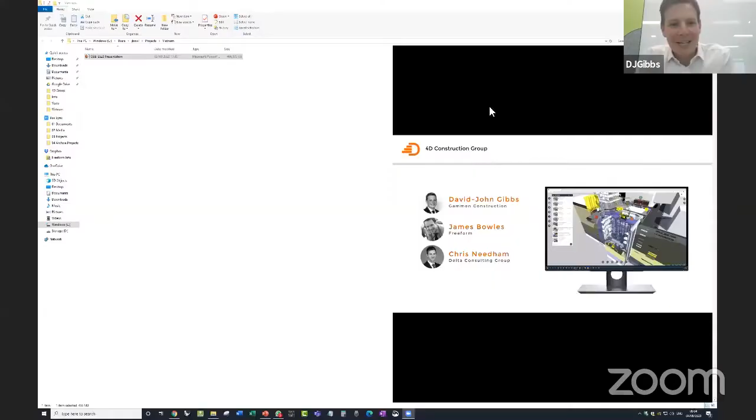Okay, great. What I should mention is apologies for Chris being left off that slide. So Chris Needham's joining us as well. And yeah, well, we're lucky to have him.

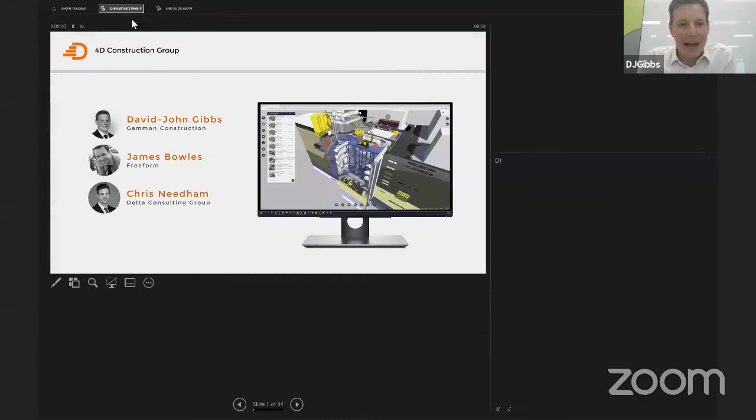I'll do a quick intro as to who we are, and a little bit of the format that we'll be taking. So this is a presentation, but we're not presenting our individual organizations. We're actually offering a presentation as part of the 4D construction group. We're an independent group of 4D modeling enthusiasts, and our goal is to promote the adoption of 4D modeling around the world.

We share our experiences to help accelerate people's adoption. Some of those people may be starting their 4D journeys as part of their BIM or digital journeys. Others may be doing it already but are looking to enhance what they're actually doing. So we try and tackle it from all angles.

What we're actually going to do today is slightly different to a traditional presentation. As the group, we get asked a lot of questions about 4D modeling. And what we found in the past with other presentations or opportunities like this is to share and discuss between the three of us, kind of like a panel, the answers to those common questions.

So I'm joined with James and Chris. Chris, do you want to first introduce yourself and a bit about your background?

Yeah, thanks. Hi, I'm Chris Needham. My background is predominantly in project planning. I came up through a site engineering route and then went into project planning quite early after my university degree. I guess I fell into 4D through that because essentially I can see 4D as a communication tool for project planning, which we'll obviously talk about quite a lot. But yeah, my background is mainly from project planning, and that's how I've got interested in this.

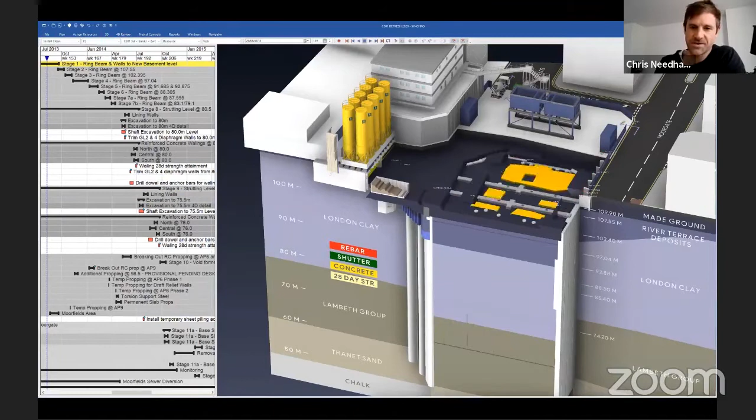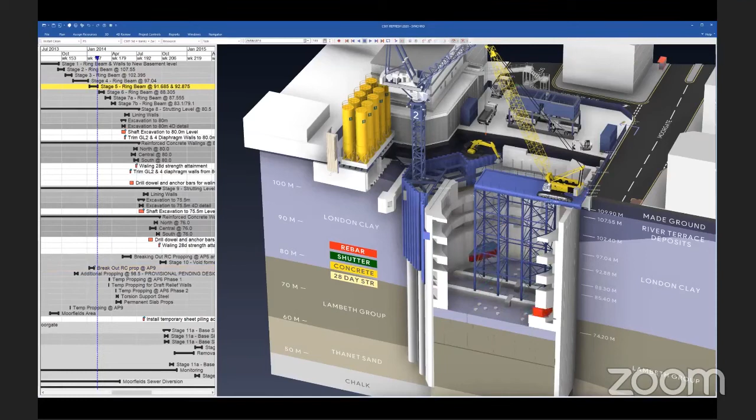But it's so much more than that. It becomes a communication tool, basically to visualize the Gantt chart for a start, or whatever way you're linking activities, but also to expand into other aspects of the project—not just project planning, but things related to health and safety, and then adding in other layers like your site logistics, your temporary works. So the value of it just extends beyond seeing the permanent works in sequence on your plan. It becomes a communication tool for the whole project for a variety of things.

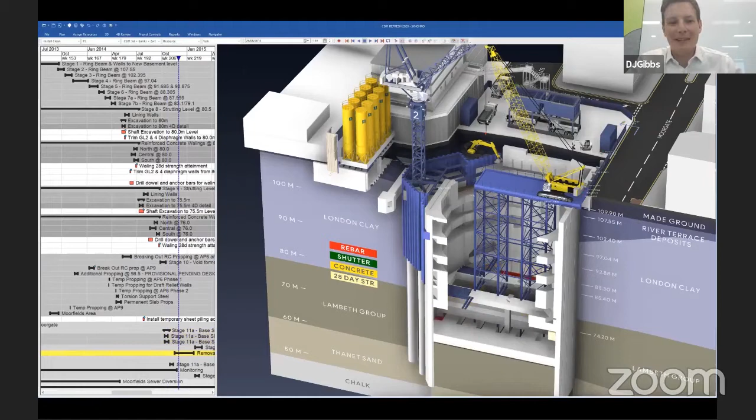Yeah, so I know we often get asked, is 4D the right term? And what does it really mean? We had a meeting with someone a couple of months ago, and they said it's a bit like a bad nickname—you get given it and then it sticks. And we've discussed as part of the group whether 4D is the right term for what we're doing.

We've talked about visual planning, people couple it with virtual design and construction, lots of different terms. For us, we're fine with 4D because a lot of people understand that term and relate to it. But for us, like Chris says, it's about a communication tool to help with planning a project better. And that's not planning a project in terms of creating a better Gantt chart or a better schedule—that's planning as in the project team coming together to discuss how they're really going to build this project.

So a tool that facilitates discussion between the project team. That's not just the planner and the BIM team, that's the logistics managers, the construction managers, perhaps the commercial team, safety officers, and so forth. So it's not isolated, in my opinion, to a specific individual or a specific job title. It's to help the whole project team deliver that project better. You'll have specialists using the tools for 4D, like the software packages, but they're just part of the team facilitating. It's not their responsibility to solve all the problems. That's the whole team effort that comes together using this tool.

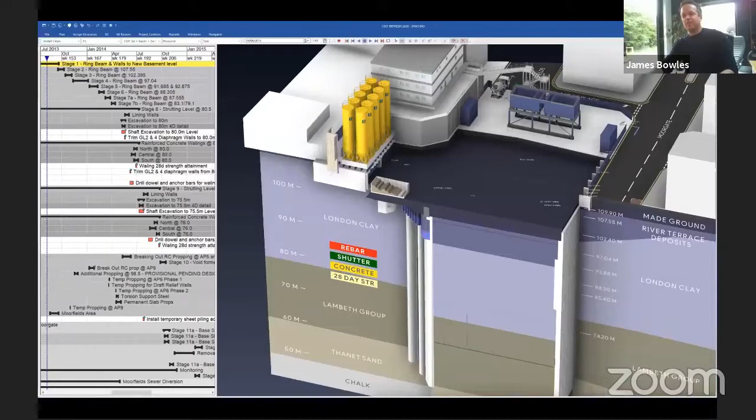Okay, there's very little I can add to that, I think you've covered everything. So if I go back to the model, 4D, like you're saying, it's 3D plus time, but it's also the process, the method of doing it that's really important. It's important to get people in a room using the model, and to do it early before you've made all your decisions. But yeah, it's collaborative planning. It's a better way of working.

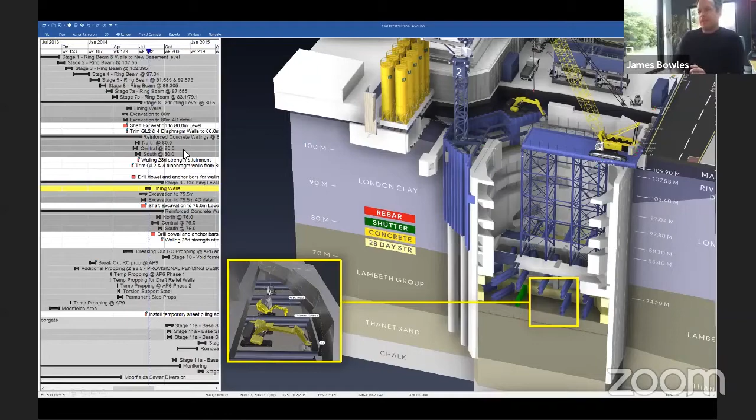So if I remember the slide deck, skip through those. Why do teams do it? Why bother doing 4D? Why not stick to just Gantt charts and activities? Why is it better?

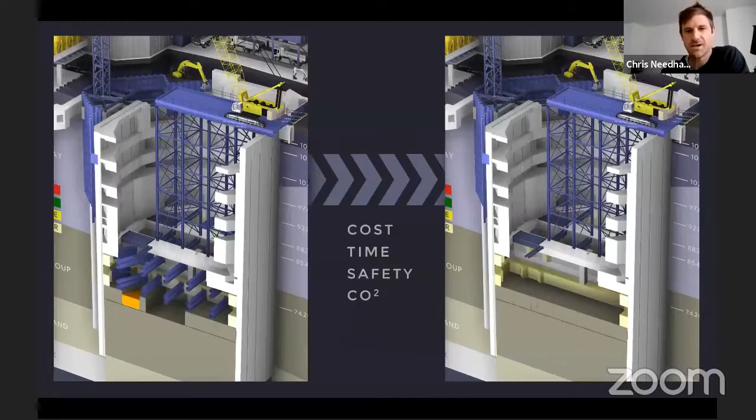Yeah, I think we sort of touched on it there. It's bringing the team together, because traditionally, sometimes you get situations where teams are in silos and they produce information independently and then stick to their roles. You've got cost guys doing the cost things, engineering guys doing their bits, and then maybe the planner will do his bits in isolation. What we're trying to do here is get everyone round the table or in the room and provide their knowledge and expertise, by being able to bring the plan out into something way more visual and way more engaging. So that's just one of the reasons to do it, so that you can get a better informed plan before you go and build something. And that's just a catalyst for many more reasons why.

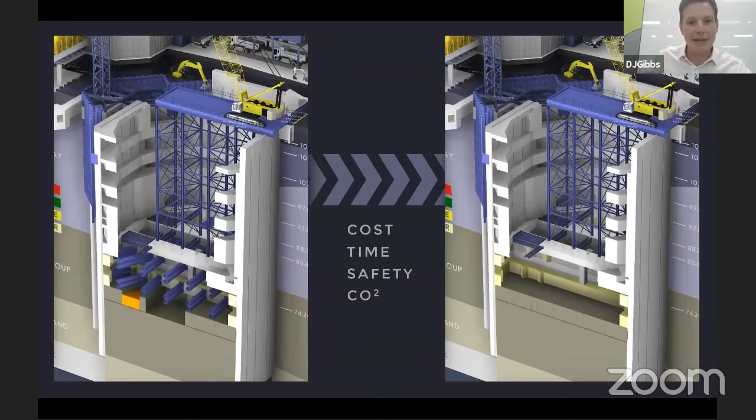Well, and that leads to better, more certain project delivery, right? So you've got better control or understanding of your costs, better control of your timely delivery. You're hopefully creating a safer site, a more environmentally friendly site, perhaps reducing waste and running times of unnecessary plant and equipment. So we believe, well, we don't believe, we know, we've witnessed through better planning using 4D, that you can unlock some of these savings or some of these benefits.

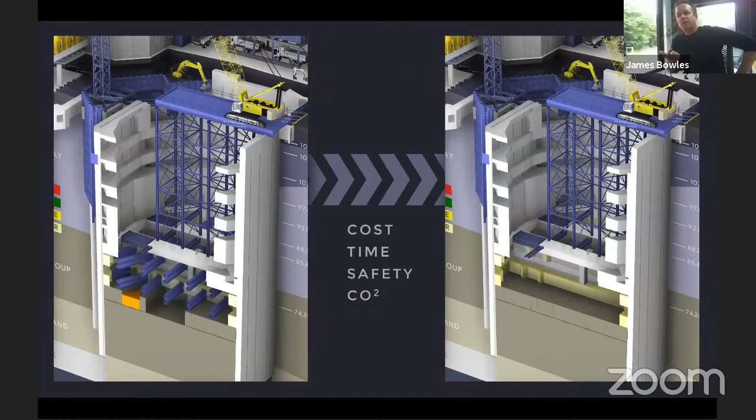Some projects might be distressed and they're trying to pull them back online. It can help with that, but used early, it can definitely help with that front end, meeting those really important KPIs for a project. So it's time, cost, safety, and reducing wastage. And finding opportunities, identifying risks earlier so you can actually deal with them earlier. Because obviously the earlier you can identify things, the more time and the more opportunity you've got to reduce them or maybe even eliminate them.

So yeah, there's so many benefits to getting people in a project engaged around something like this. That's very hard to do using Gantt charts and PowerPoints and sketches of how you're going to go and do something. I mean, I don't mind looking at Gantt charts because I'm kind of used to it, and I have that picture in my head, but a lot of people hate looking at Gantt charts and Excel schedules, because it's very hard to visualize what's going on.

And even linking 2D plans like we used to with PowerPoint, when we do sequence drawings against the schedule, it's obviously not as visual or compelling as linking a 3D model and being able to see that sort of space element as you run through time. It gets you there faster, and it gets other people there faster as well.

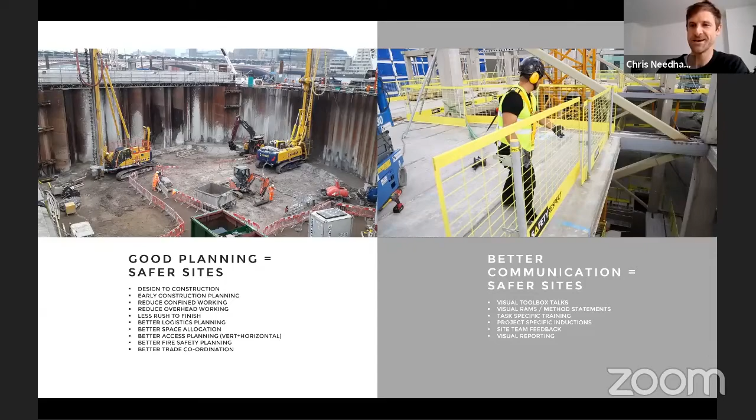But getting that message across is a lot of work. Whereas if you've got something like this, it can be a lot quicker and a lot easier for someone to visualize and ask questions. Because you do want people to ask questions to confirm that they've actually understood it or not. You want to be on the same page.

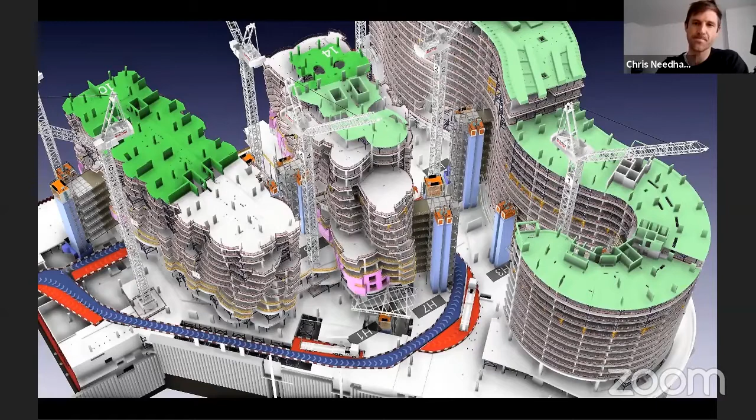So for me, this slide really captivates what the benefits of 4D could be. What we've got here is such a complex site, there's a lot going on, and this is only part of the site. There might be a bit more happening around it too. Just looking at this, you've got 1, 2, 3, 4, 5, 6, 7 tower cranes I think I can count in that image.

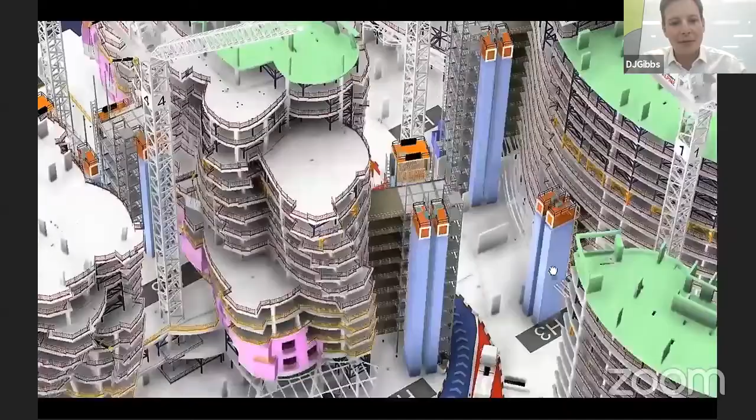Those obviously want to be fully utilized. You've got access roads, trucks parked up with deliveries, lay down areas or storage, and big hoists as well. And that's only at the macro level. Then at a more micro level, at a floor level, which are pretty huge, you've got activities going on within that.

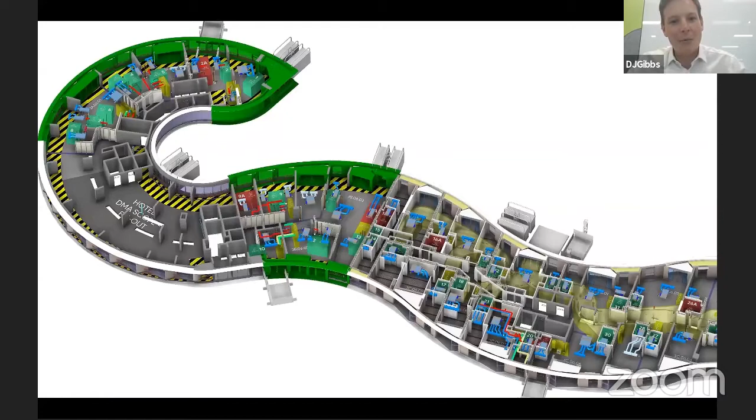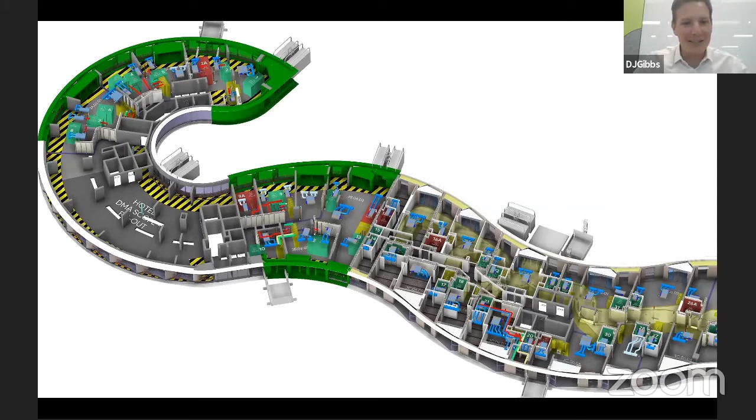Now, that will all be presented in a Gantt chart, and you're going to have hundreds of thousands of lines, or tens of thousands of lines, to try and understand. It can be really complicated. Hoping that everybody in that project team is thinking exactly the same thing, based on digesting all those individual bits of information and thinking about what things will look like at a certain point in the future, is very challenging and very optimistic to think everybody's able to be on that same page.

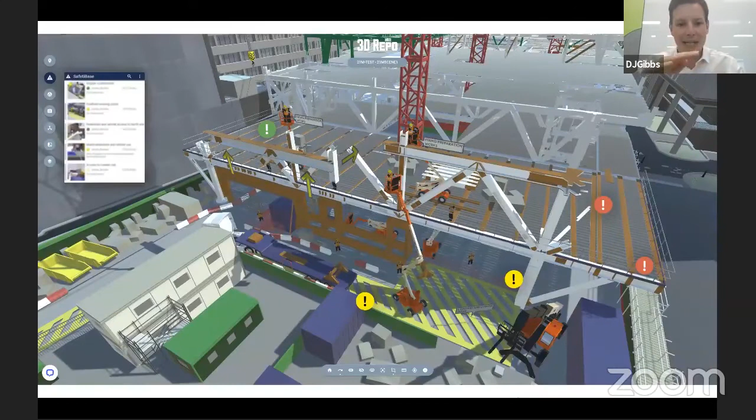The beauty of the 4D model for me is that you're consolidating all, or as much of that information as you can, into a single area, a single medium, the 4D model. You can zoom in and understand, and everybody in that meeting knows that on that date, this is what the construction site is proposed to look like. And everybody can have an input to say, well, that will work, that won't work, or what other measures might be needed to inform that construction.

So we're not waiting to be in the physical environment to have an input. We're building it digitally and then getting the team involved, having that discussion that we would have had on site weeks, months, maybe years in advance, to help improve the performance of that project.

We did a podcast with BAM, and the point they were making was we build it first and then we build it again. When we build it first, we're doing it virtually as a team, so it's the same people doing the same thing, figuring out how to build something, and then they go and build it. You improve performance by that because you're improving safety and methods, and that's what 4D is.

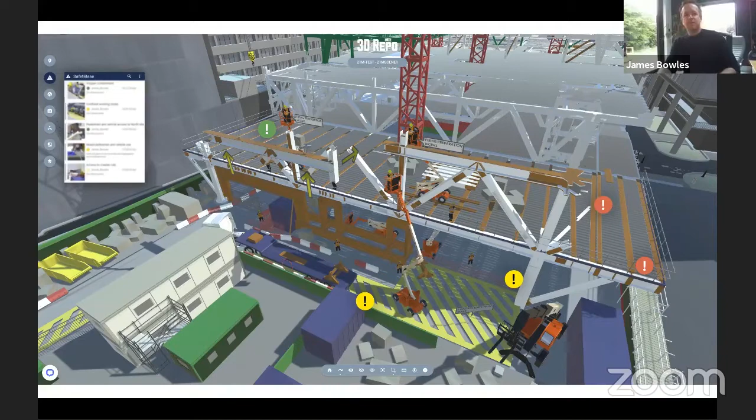So I think that's answered. They used it, wasn't it? Yeah. Oh yeah, I will get that edited, by the way.

And that previous slide's a good one for the safety issues, right? Like I always talk about running that safety workshop or workshops, and not using it as 4D is a facilitator for that safety workshop. It's not the 4D workshop.

And here, you've got great opportunities to add that detail in. You can start tagging issues depending on what software you're using and so forth. So you're recycling that information. You're not producing your 4D for an animation. You're producing it for method statements, for safety reviews, for site posters, for inductions, for sequencing, for logistics.

I wouldn't call it an output. It's a process that provides you with lots of communication measures, depending on who you're trying to get that message across to, whether that's site, senior management, projects team, whatever that might be.

Yeah, and it's these things that we can see in the image here, the actions around building, putting together the permanent design. That's where you get the real value.

Because you need to speak to the people who are going to be doing it, your specialist subcontractors or your site managers, whatever, to get their input and get their buy-in, or just confirm that they can do what you're thinking, or what you've initially put forward as the planner, say, or whoever's putting it together initially. Then get them to do that 360 review and say, well, actually no, we wouldn't put the laydowns there, we'd need to move them over here because of this and that.

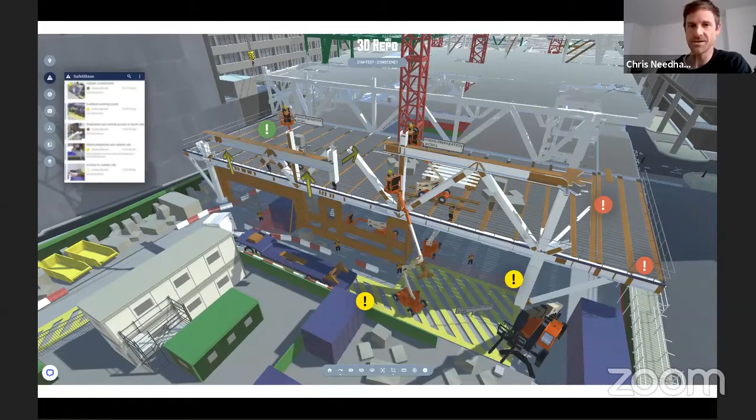And because ultimately they're going to go and work the way that they want to work, regardless of your plan, but you need to make sure that they're in tune with the bigger picture. Yeah, and that it all fits together. Yeah, that's a good point.

So how do I run a 4D workshop? What is a 4D workshop and how do I run it? What does it look like? You're best placed to answer that one, James. So I just answer my own question. Okay, yeah, I think so. Your job. I'll just use this slide.

So, invite the right people in, which we've already spoken about. That's something the 4D construction group is encouraging, isn't it? We're saying this is about people and it's a method. So invite people into the room, get the model up on screen and start talking through, just start doing it.

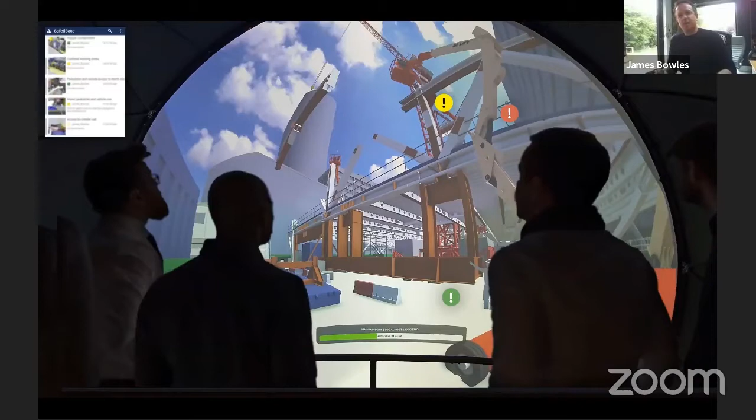And that might look like some of these. It might use other technology like BIM caves, but basically just get the model up and start figuring out how to build it. So this here is an example from a project that we worked on a few years ago.

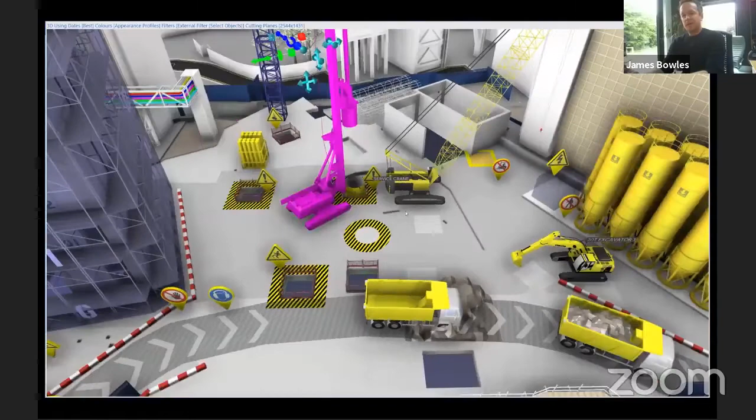It's a screen record of a workshop. So this is all live, and this is myself and a colleague with maybe 8-10 of the contracting team. So we had piling contractor, demolition contractor, and the main contractor. And on the other screen was the Gantt chart. So we were going backwards and forwards in time through the activities and moving the logistics in the model.

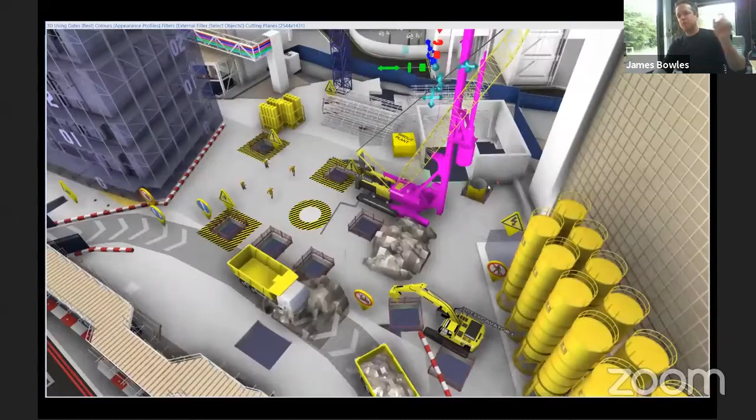And this is what we do at Freeform, but what we kind of would want to see on more projects is this kind of behavior of planning works. And coming back to the podcast that we recorded last week, is that method of working.

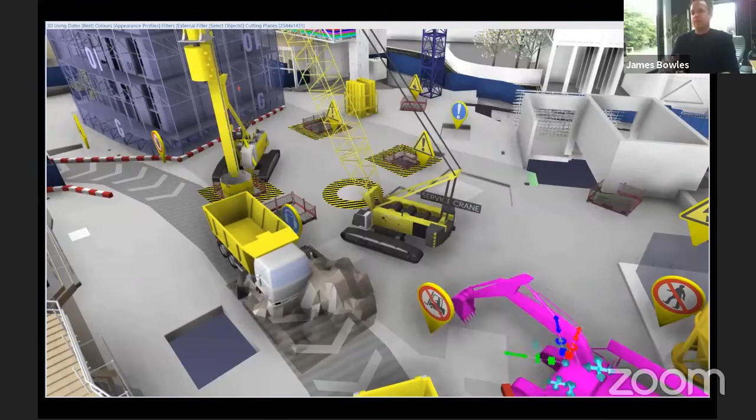That's okay. How are we going to build this? Exactly what are we going to do? Let's plan it 3 months in advance of the works, so that we can then impact the temporary works and the hoarding lines and the barriers, and just figure out how to build things. And that's what we see as 4D, isn't it, guys? Is that kind of process?

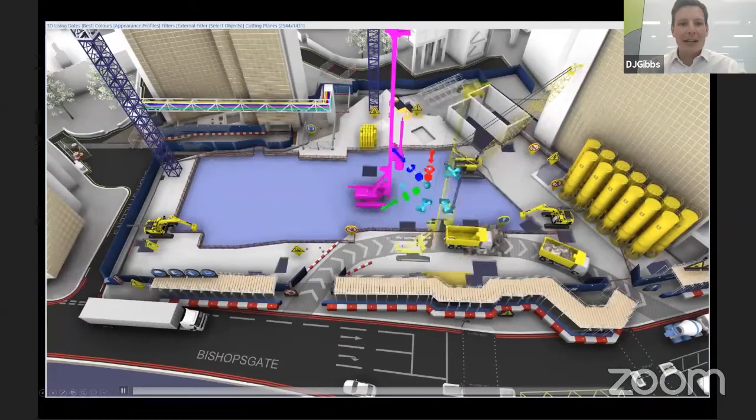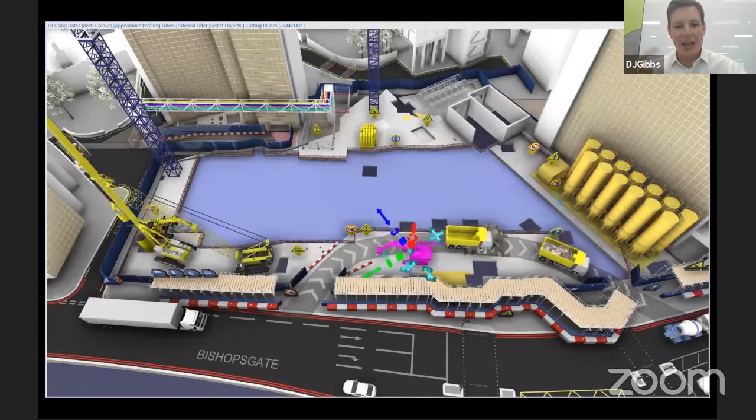Yeah, and I think that's it. To answer the question, how do you run a 4D workshop? I think first things first is run one. All too often, particularly when I started looking at 4D 9 years ago, it would be someone from the BIM team or perhaps a planner that produces something and it just sits in the corner and it's not shared. They may have done it just to check their program, or just as an innovative use of their own time. The main thing is sharing it.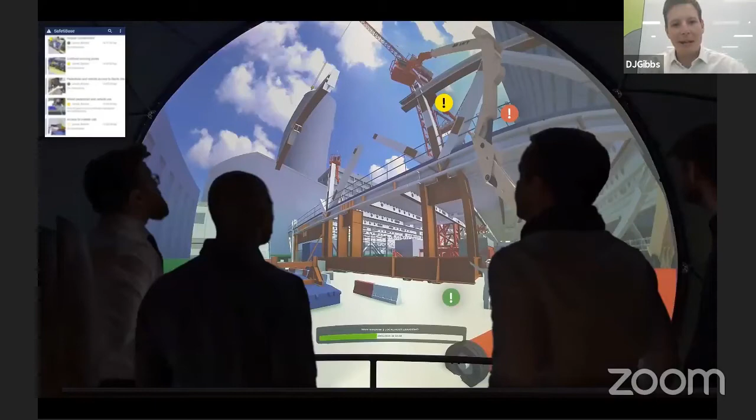And once it's shared, you may look at the models being displayed here and think, oh, there's extra detail there that we don't model. There's, oh, we can't do this, there's no point in doing that. The detail in those models is led by the information that the team need to make decisions. So they don't have to start off necessarily with all of that detail.

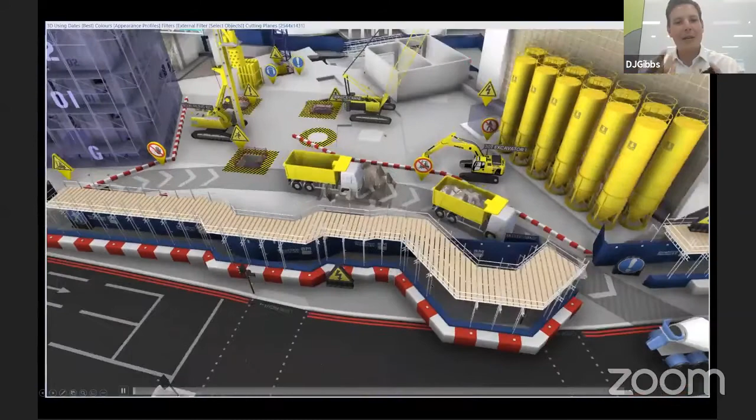But as they go through iterations, as you have a workshop and the crane driver says, oh, I need to be able to see where my storage areas are, or where the site cabins are going to be, then that can be taken away. That information can be incorporated, and the next meeting, whether that's in a week's time, a couple of days' time, whenever it might be, they can then have a more informed discussion.

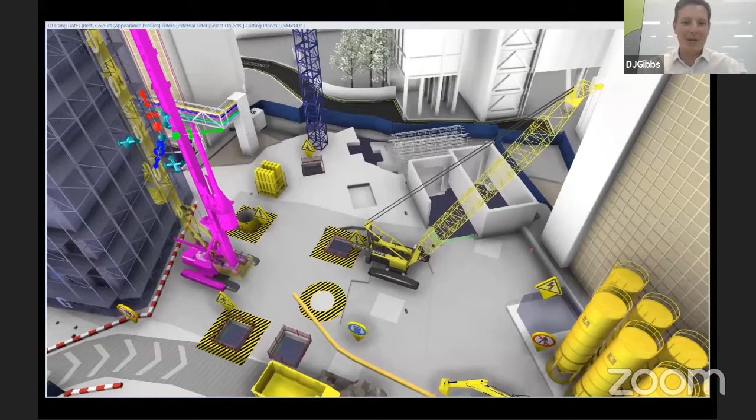And then it might be the operations guys say, well, actually, we need to know the delivery route. Is that truck going to fit on that? What if we've got trucks wanting to come the other way? And you can start testing those things out in the meeting. So yeah, the level of detail will improve. And don't forget, as Chris always says, the plan's never finished and the design's never finished. So get what you can ready and discuss it.

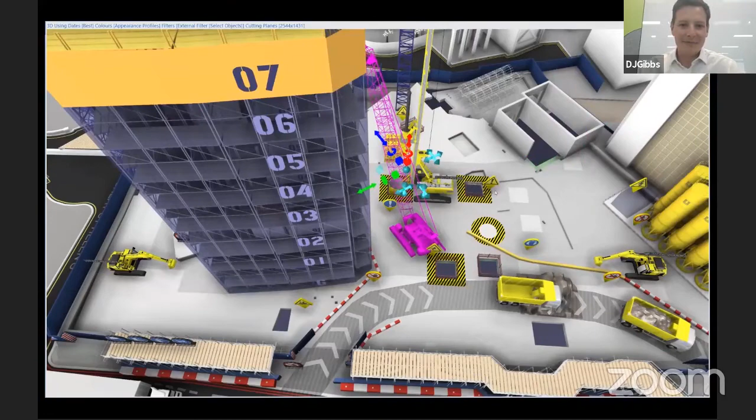Yeah, I mean, you can do your best at predicting the future, but none of us will ever be able to 100% accurately predict it. It's only right when it's as built. When you're looking back, as long as you've got good information, that's a different story. You can get closer with this kind of process, can't you? You can get closer.

Exactly, so more predictable. Yes, this is it. So people often think this is the answer, but it's not.

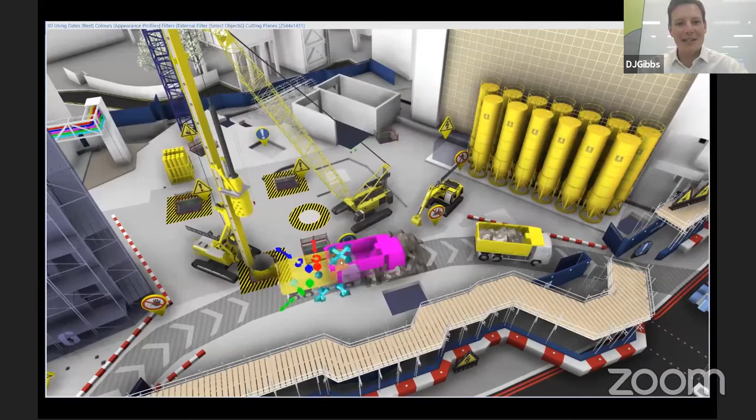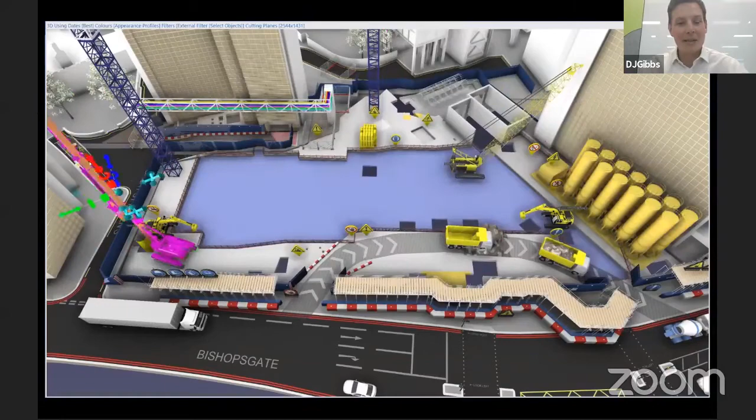For me, this is the discussion. If this is perfect and you've got it right first time, then you're an awesome team. But to be able to get it right every day going forward throughout the whole project is probably unlikely. What you find is people will ask for more information.

Like we said, won't the scaffolding be there? And then someone will go, has the scaffolding been designed? And they'll be like, oh no, I need to do that. Or has someone procured that specific crane? Oh no, we need to do that.

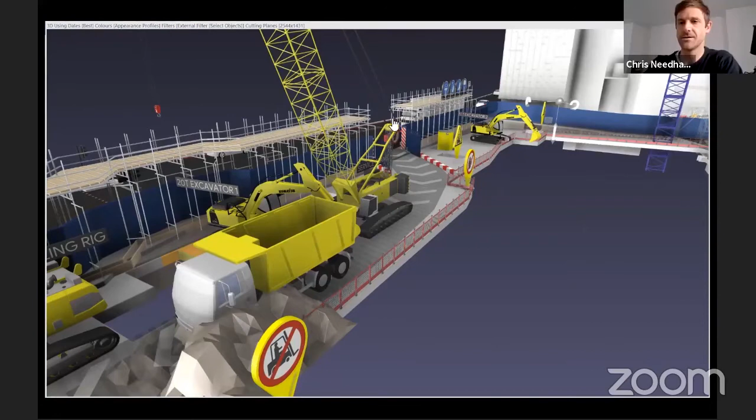If you give yourself enough time, you're obviously proactive about it, but it opens up that environment to have those discussions. I always use that example, but we ran a workshop, and in an hour's workshop, there were 100 questions that got raised.

My question to that is, when would those questions get raised otherwise? Don't get me wrong, the team would ask, but would they ask with everybody in the room? Would everybody be on that same page? In the meeting, you could probably answer 70, 80% of them, and everybody knows.

And whether that's, okay, next week we'll include that as a bit of detail. But those questions that can't be answered in the room are really important, because those are the ones we go back and create more information and then incorporate them, because we need that information to build the project. If we can't do it digitally, we're not going to be able to do it physically. So it's a really iterative process.

And going back to the reason we started this, it doesn't have to be finished to have a 4D workshop. Start it and build it.

And DJ, that workshop you're talking about, you didn't call it a 4D workshop, did you? It was a health and safety workshop. But you were just using 4D as the tool, as a catalyst for being able to engage people in the discussion.

So we wouldn't call them a 4D workshop per se. There might just be look ahead meetings or logistics planning meetings. You've just got this tool which is an improvement on the old way that you would do it.

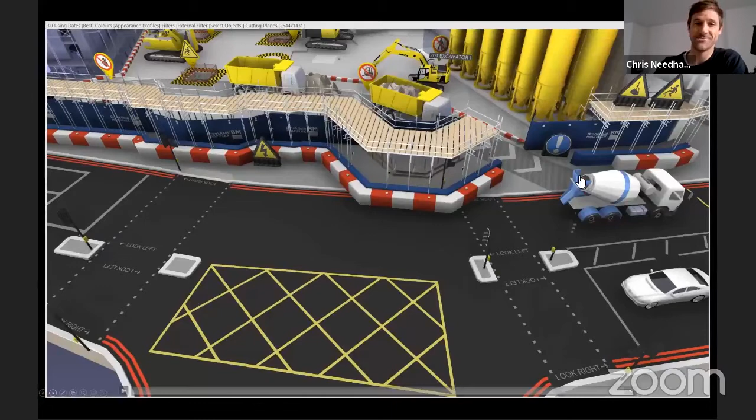Like those examples James was showing with the piling rigs moving around, we'd have just done that with probably cutouts on bits of paper, genuinely, or PowerPoint PDFs with scaled cranes or things that represented the space they were going to take up. So yeah, it's called 4D, but really it's just a planning tool.

So there's a few other points here before we move on to the next question. Firstly, there's an investment required for this kind of thing. Obviously, we're showing stuff that takes tens, hundreds of modeling hours.

And what we all believe here is that that's worth the effort. It's worth spending money at the front end of a project to ensure the physical version, so that the virtual cost, the cost of doing things virtually, is far less than doing things in the field.

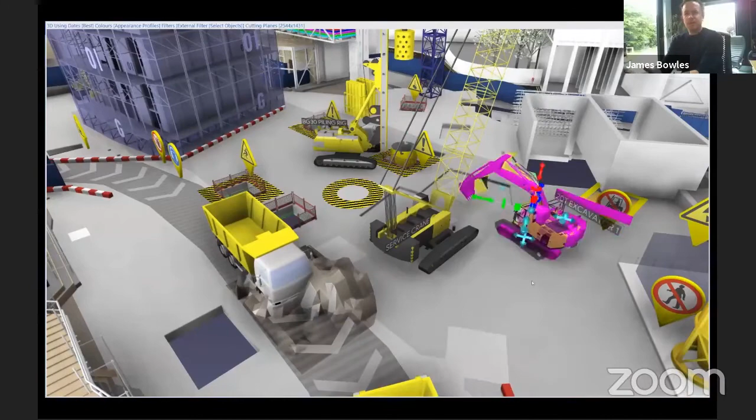And we would always sit behind that, wouldn't we? We'd say, yeah, okay, so for every modeling hour you're putting in, you're saving 10 times at least more, hundreds of times on sites when you come to a problem.

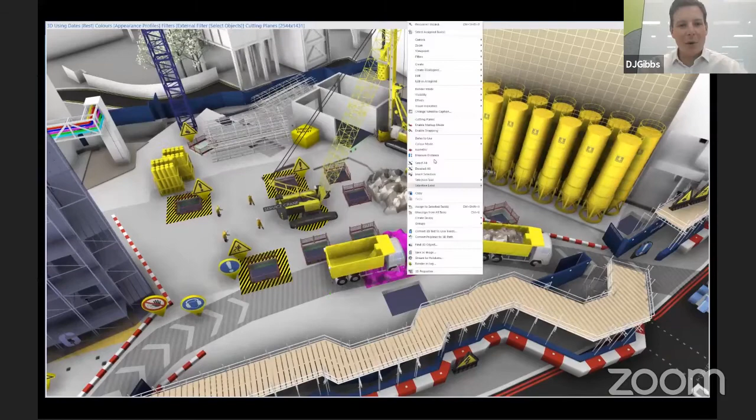So that's another thing to consider, isn't it? The amount of investment required. But investment proportional to project value is generally quite low. I mean, it's hard to imagine, it's 2020, and it's hard to imagine building a considerable project, say $100 million US, without adopting in some shape or form a virtual representation of how you build it.

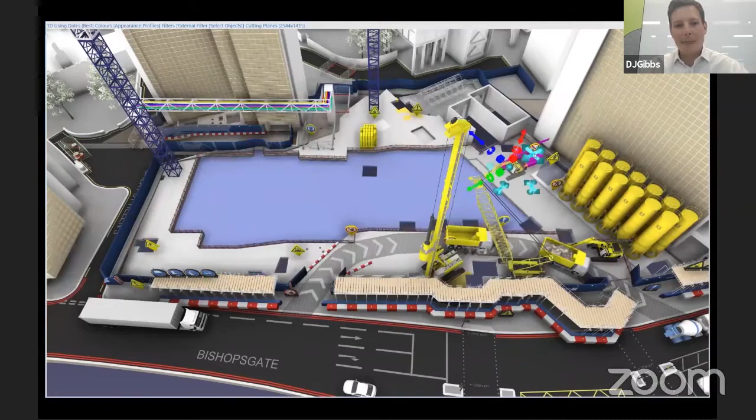In my opinion, we've got the tools. Training is available. We're connected globally, that's part of the 4D group. We want to give people the confidence to be able to start doing this and share the practice in, well, how best to get what you want out of it.

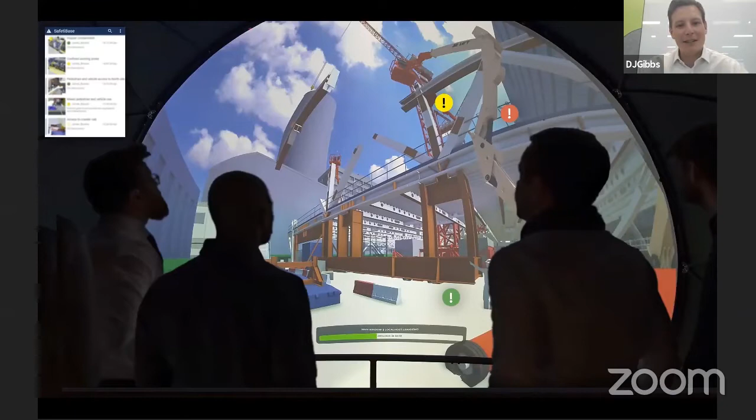So we've spilled over a little bit, but let's go on to the next question. So can I do 4D at feasibility stage? Or more of a question, when should we do 4D?

DJ? Yeah, well, we always say as early as possible, don't we? Yeah, well, I think the answer to that is yes, you can do it at feasibility stage. And perhaps we part answered this question previously.

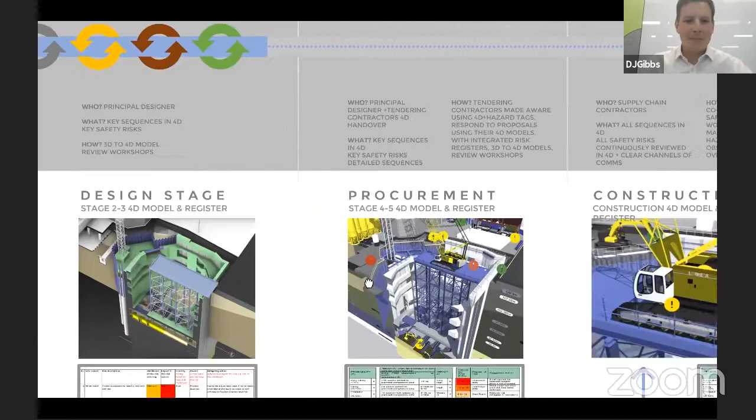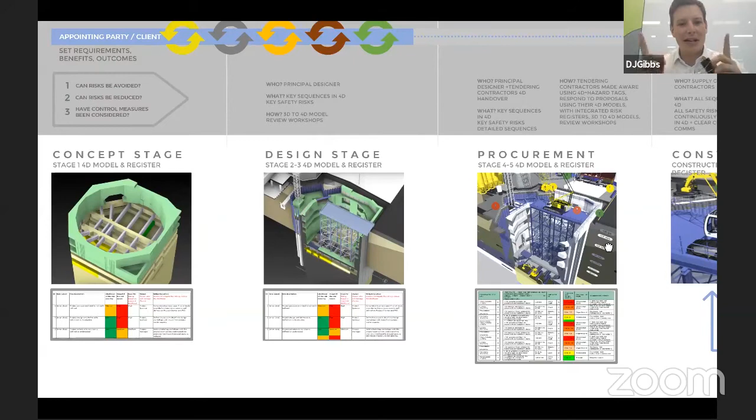Yeah, you can, and you don't need high levels of detail. I won't steal the thunder, James, but I know you helped with some master planning years ago for a large developer. You've only got a few bars of Gantt, high level bars, and your model can just be big squares. But what I was trying to achieve was understanding the relationship between, say, railway stations, schools, whatever they might be, opening and closing times.

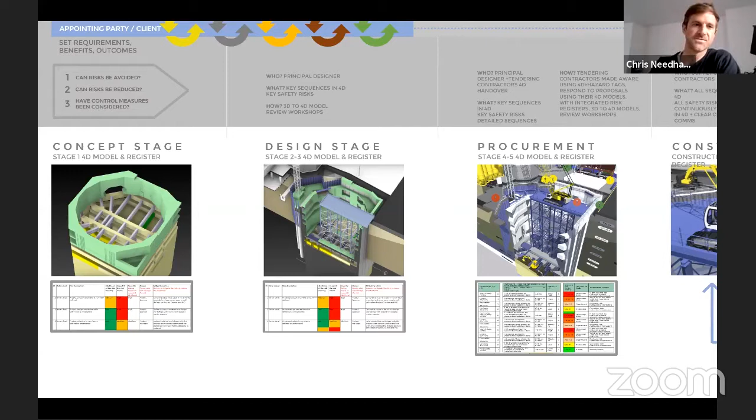And you can do that nice and easy with 4D. The skill then is updating it and keeping it current. It's the same principle as if you take the BIM principles of massing in design, isn't it? Allocating space for systems - you don't know what the detail is going to be, but you know something is going to take up some space and you can make a provision for it. So it can just be a block, and then that can evolve into the detail as you go through the design process. In the same way you do that, you can do that at the planning, project planning stage.

Yeah, exactly. It's making that provision, isn't it? And then procuring on something that's visual, not just the information we're used to seeing when we go out to market. Because when you don't have the detail, you are going to have to make assumptions, based on your experience, or you're going to get the people who have good experience and ask them. And then those assumptions will become developed, and they'll just get baked in, or some of them might go away and be changed. But that's all part of the process.

Assumptions are risk, aren't they? Effectively, yeah, or they're just - well, this is what we've done previously, and this is what worked previously. So we'll assume we're going to use this method, or we'll assume the design is going to accommodate this method of structure or whatever. So you can make it - there's nothing wrong with making assumptions as long as you're clear on what they are, and then they can just be explored and become incorporated into the design, program, whatever it is, or they'll be changed and detailed out.

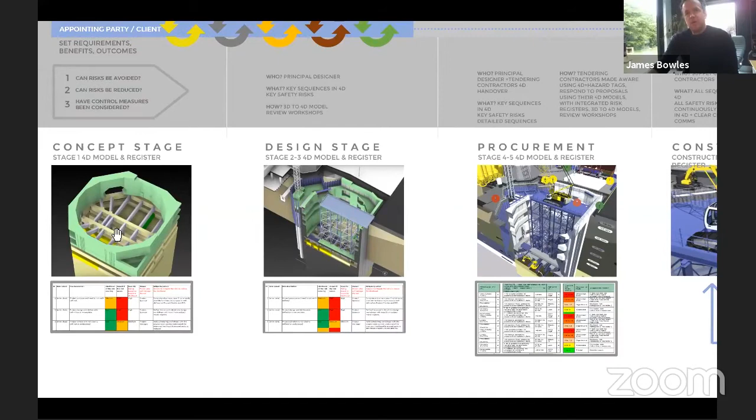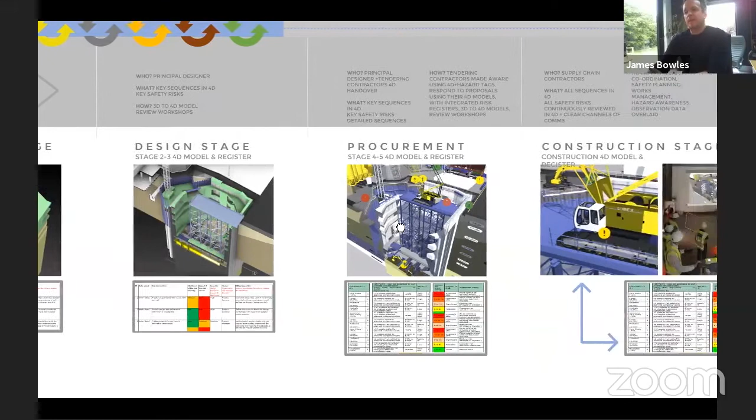I mean, we're seeing a lot more of this from Freeform as a business - much more of the contractors and designers and clients we work with are interested now in doing early 4D modeling. So doing 4D at concept stage, blocky stuff, that then becomes more detailed as the temporary works designer joins the project and adds their information and geometry. And then as it goes out to procurement, detailing and logistics, you keep adding to the model and updating it. Eventually you get to construction stage and you're right down in the details - you know what your weekly operations will be, and you're communicating that with the team, and it continues.

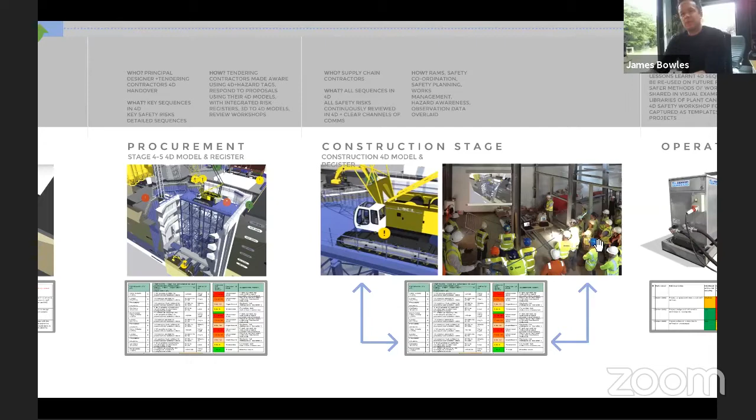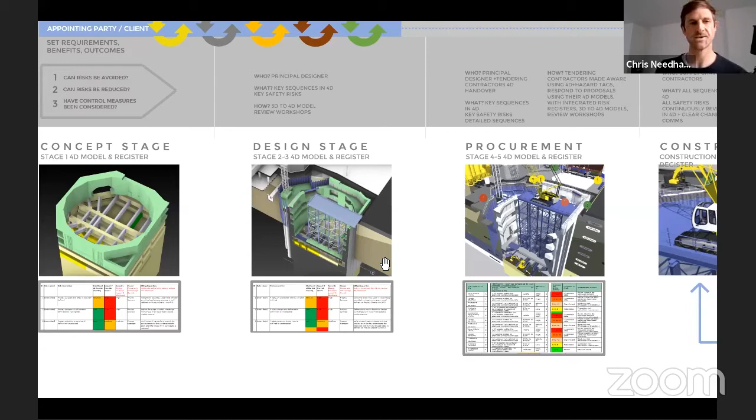So it's not an animation just before you break ground. This is something that continues, and like planning, Chris, it's like early planning and good planning. Yeah, it just evolves as more detail comes through - you can confirm what your thoughts were or change them to suit.

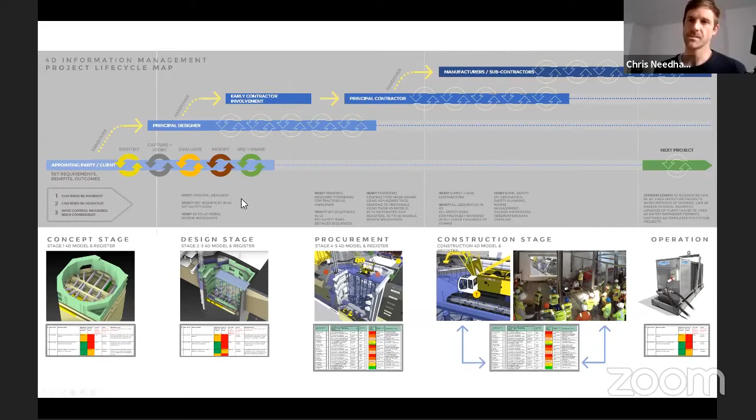Okay, is that all for that question, DJ? Nothing to add? You can do it.

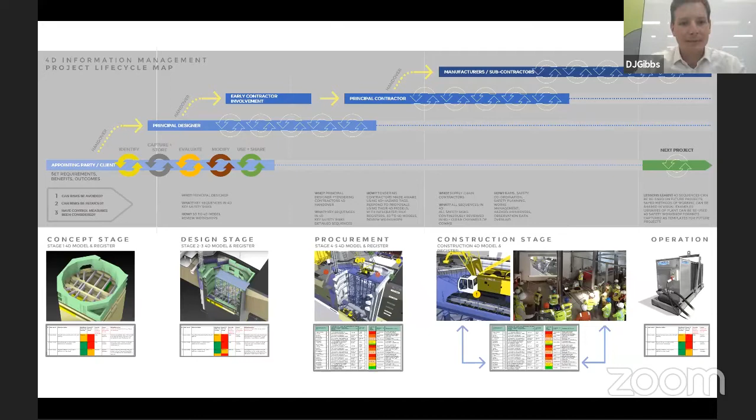The reality is planners will structure their time information in a certain way depending on the project type, and designers will break down and categorize their models in slightly different ways. Obviously everyone should be following good practice and the ISO BIM standards, but that doesn't always mean it's going to be just right for 4D. So it can be quite tricky to say there's a perfect answer.

James, I think you've probably worked on more 4D projects than anyone else in the world. From your perspective, you've got your workflows, but do they vary depending on the project? It's always a mess of information on projects - even the best ones aren't aligned. The work breakdown structure, the IDs, and the updating of them always changes. When we have model updates, they rarely flow properly. If we're using Revit, the families can jump around, the geometry IDs can change.

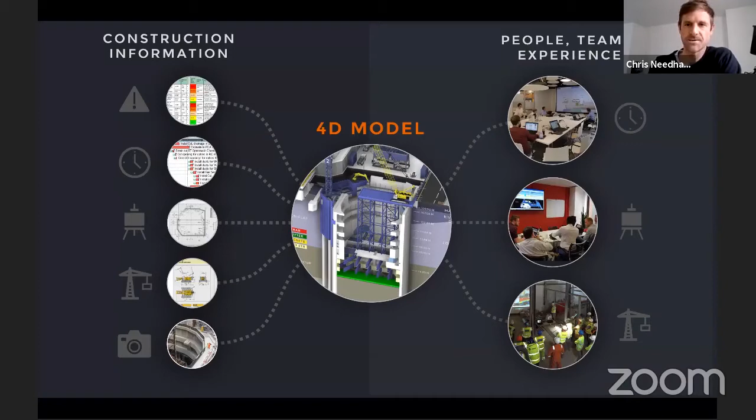I mean, with every piece of information, the quality of the information that goes in is going to produce a better output, isn't it? But even with all that good information, people still have to do something with it. This will get you to a point, but then people actually have to take action and carry that out.

A lot of the time when it comes to construction information, the classic one is 'well, we don't plan to that level of detail,' so we don't include that level of detail in the Gantt chart or in the 3D model. My response is: do you have enough information to actually build it? Because if we can't build it in a virtual world, are you confident going out there in two weeks, a month's time, that you've got enough information to actually build it? And it exposes quite a bit - people say 'yeah, but we've got 20 modules arriving this week,' and it's like, that's not enough for me. I need to know what modules are coming on different days, so I know where we're storing them, or what order we're going to start putting them up.

So it prompts that discussion, and I think it can be a bit difficult because you're asking people to do a bit more work, but it's the level of information you need to make the decisions on the project.

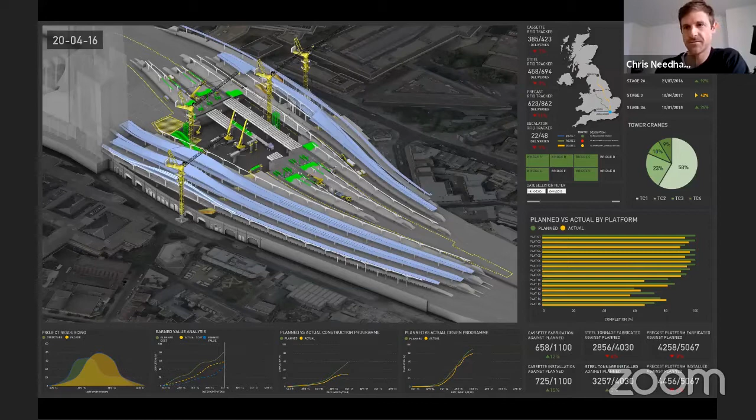And it tests your logic, doesn't it - like, what do we need in place before we can do this? All of those things have to line up. Like you say, DJ, it's like okay, great, we've got that delivery coming, but have we got the method statements in place? Have we got the walls up? Have we got the routes planned out? How are we going to lift them in? All of these things need to be answered before that thing happens.

Yeah, so 4D encourages that, doesn't it - there's nowhere to hide. You can't just have 3,000 activities listed out over 10 pages of PDF and say we've got that. But on that date, that doesn't look right - you haven't considered A, B, and C.

Things like modules are a good example, or bathroom pods, because they interface with so many other things, potentially the facade of the building. On the face of it, it seems quite obvious, but like you say, DJ, there's a lot of things people can overlook - if the person responsible for producing a certain document that needs to be in place before you can do something hasn't included it, or isn't aware of the timing, and they're prioritizing something else. So it's important to understand all the information needed for each process, and then use something like this to make sure everything's lined up logically.

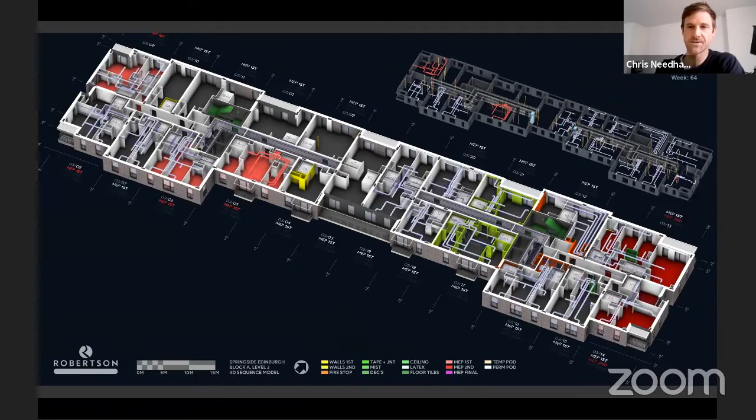That concept of rehearsals - I think James, you brought it up last time - talking about who else does rehearsals. You've got actors and actresses, they do rehearsals before they go out to perform. And it's a lot more costly to mess up a construction project by not planning and rehearsing it digitally than it is to look a bit silly and fluff your lines in a theatre performance.

But on a more extreme measure, some doctors will do rehearsals before they do an operation, and that's because it's the most critical thing going - it's life or death in some instances. There's a spectrum there, from very extreme high risk to, obviously, people wanting to be great professionals but not having a fundamental cost or safety impact.

But those two areas still rehearse, and we don't, despite the huge amounts of money that we deal with - normally public money. A lot of the time it's taxpayers' money, the people that everyone on this call is probably funding something, and we want the best for what we give to government. This is a great way to help that.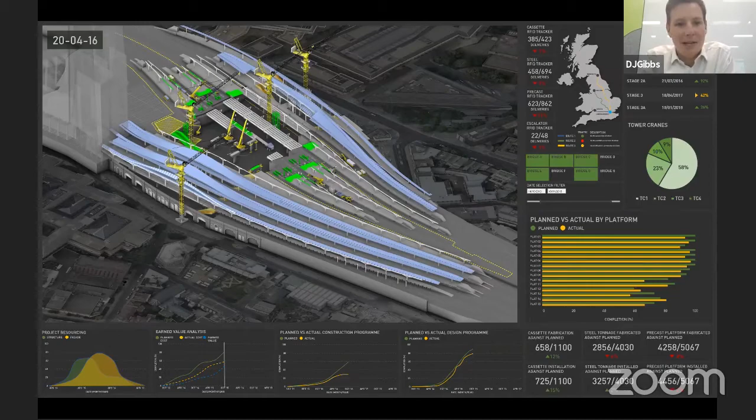Okay, so who should do it, of the project team? Who should be responsible for bringing all this information together? Or is it everyone in the team that provides information? How should it happen? We've had this conversation a lot over the years - who should own it. Is it a planning function and role, or is it an information management role? Is it about information, or is it about time management? What is this about, how should we go about it?

What would we recommend? It needs someone who understands the overall plan, and it needs to be someone who's leading the project and who's able to facilitate these kind of discussions and get good information out of people, because that's essentially what you're trying to do - you're trying to get the experience out of your team and get it into this plan.

In my experience, where you've got team leaders who are on board with this, these things go really well, even just on a program, planning-driven perspective. When you've got people who are not interested in it at the highest leadership level, it doesn't tend to happen very well. So you need someone who's going to drive it from the top - not necessarily be responsible for it, but encourage everyone to get behind it. That way you'll have the right environment and systems in place to make the most of it.

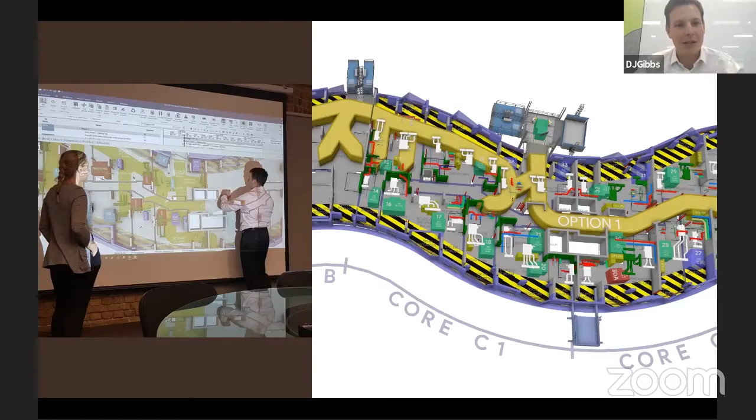But the actual roles are different. In one of the packages, the planning team is taking control of the 4D. In the other work package, it's the BIM team taking responsibility for the 4D. I personally don't think there's a right or wrong answer - they're both doing pretty well, and as we've said, it's a shared responsibility.

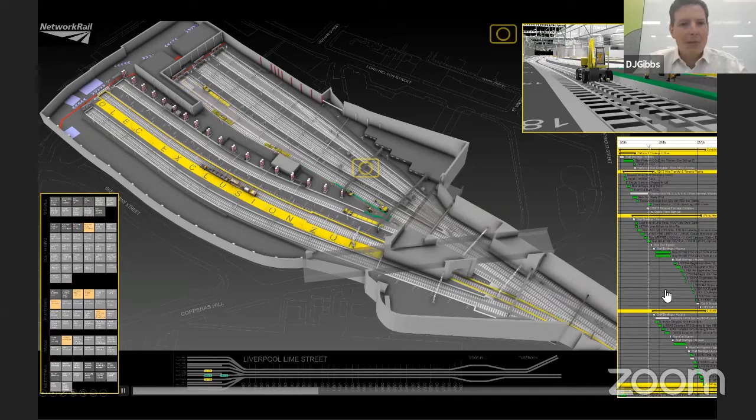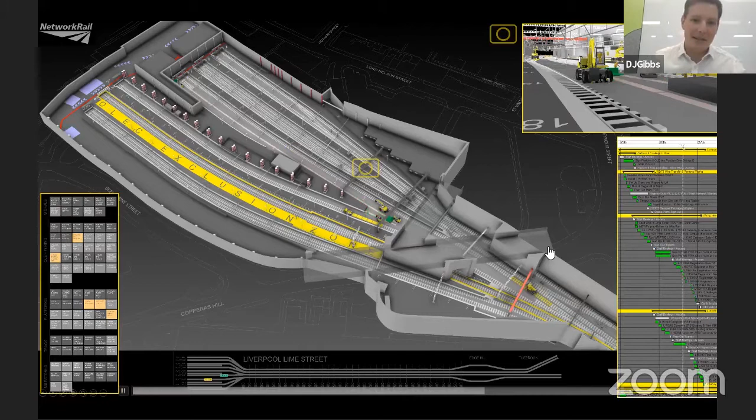It's the project team that should own it. The person pulling it together should perhaps be the person with the skills, the experience, the personality to drive those meetings and get that information, as Chris says. But I don't think we've found the unicorn 4D planner or the optimum position - a lot comes down to the individuals, the business and the project, maybe. It could be anyone.

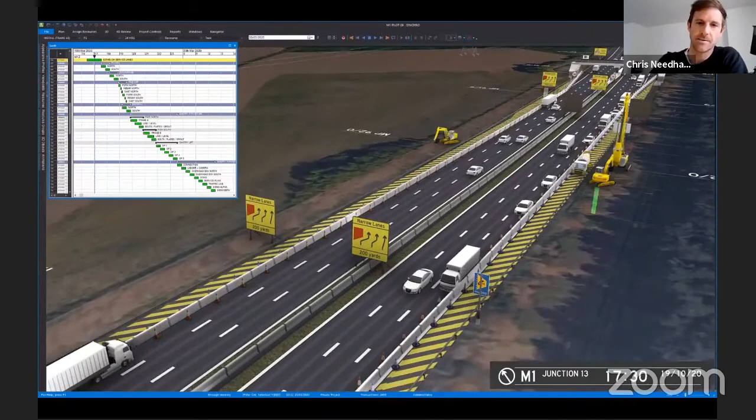These things that James is putting up here, they're outputs, aren't they, from a point in time - a team or people have fed into this based on information they know at a particular point in time. And that is their best guess, if you like, of how they're going to do it.

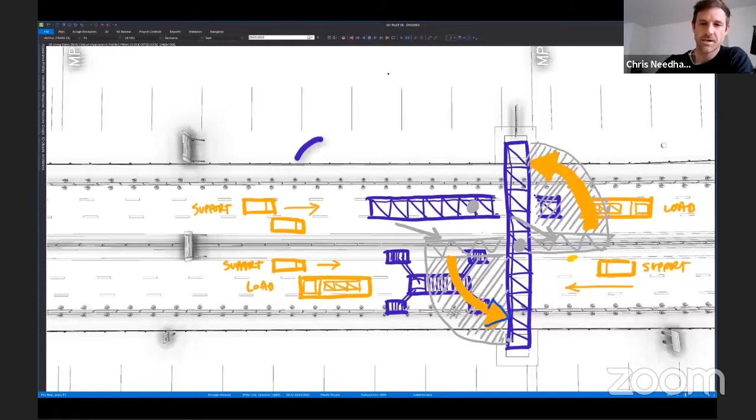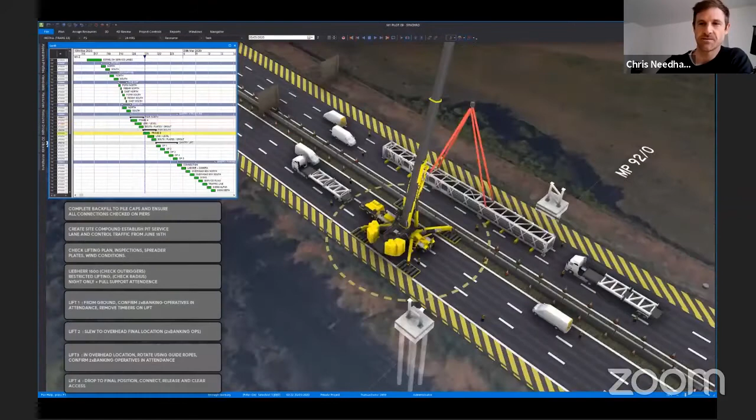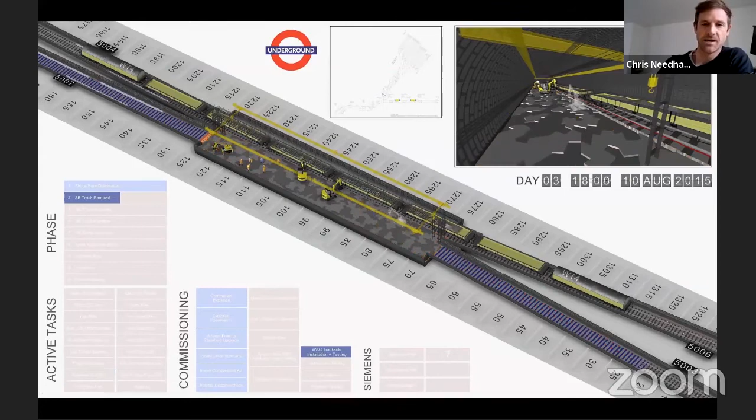Again, it's just an output. Someone with the skills in the software has put this together from that discussion, but the real value is behind the team discussion and them being able to see this and go, okay, well this is how we all agreed it's going to go together. And then as things move forward, things will probably change slightly and this will be updated. But again, it's just an output. What actually happens will actually happen. By going through this process, hopefully it happens closer to what people planned rather than just turning up and going, okay, what are we going to do?

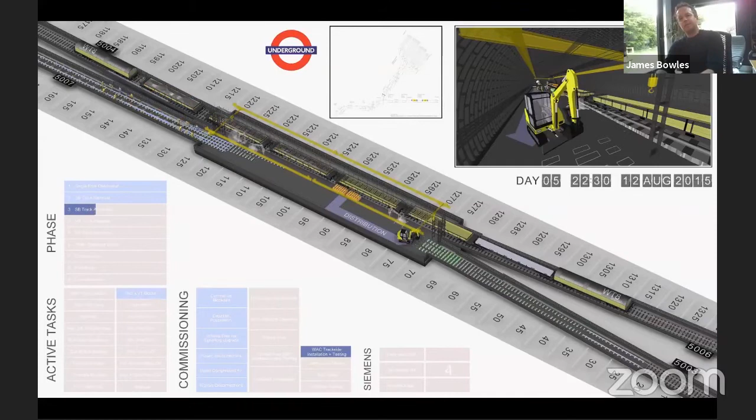There's a range of success of using this method on projects, and as you'd expect, the best ones are where the team turn up to those workshops and they want to figure out how to build it, and then they use 4D to figure out how to build it. The worst projects are ones where the team already has that kind of confidence in what they're doing, and they think, okay, in 3 months' time we're not going to have problems. We don't need to see it, we don't need to figure it out. We're fine, we've got our supply chain, we've got our subcontractors, everyone knows what they're doing. Then this is treated as just an animation - we'll create an MP4 file, put it here and leave it, and we won't actually figure out what's happening.

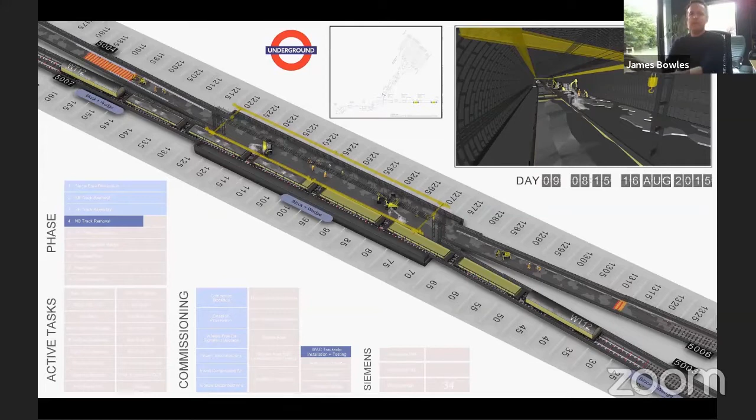So it always depends on the team. It doesn't matter if it's the BIM manager or the planner or whoever's doing it - it's the team's attitude.

There's a lot that can get wasted that way, isn't it? If you can't get the message across, or get the engagement more than anything, then it ends up like a lot of Gantt charts do in the site manager's top drawer, gathering dust, and this just ends up on someone's desktop somewhere, which might have been watched a couple of times. But yeah, I wonder if there's a way of measuring projects against that kind of thing - good teams, bad teams. How well did you do? How much do people want to improve or plan the works, and really get engaged in the project, rather than just turn up and do stuff day to day. It's not me being cynical.

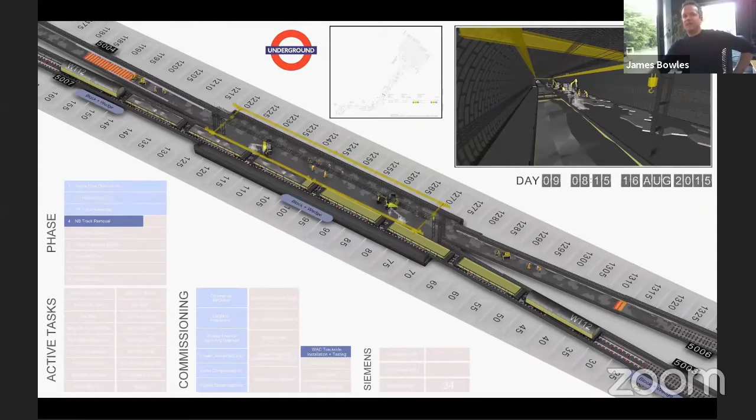So I think that's almost it, that's all the questions. We're nearly at the hour, so I don't know if that's okay. Yeah, I think that's good. I saw there's a Slido page that's come up, and I don't know if we've got any questions in that, and I'm not sure how you'd like us to handle that. I don't know if I click it. Hopefully I'll... some event thing.

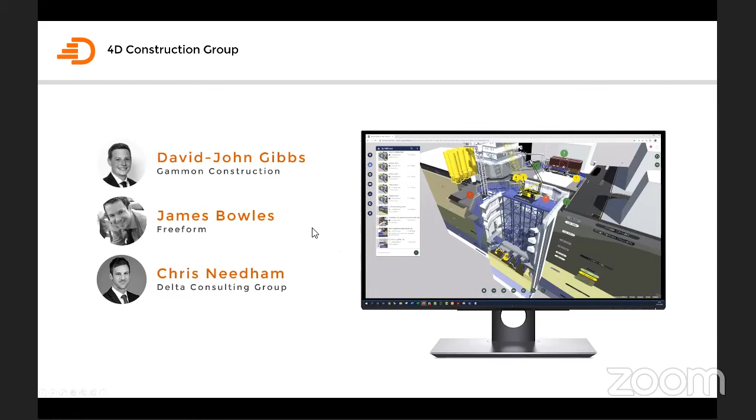Yeah, I can share the Slido now, or you can open that. Hang on, if you could share, that would be great. Okay. So we have quite a few questions here. Okay, I'm not... you might need to help me with the top one.

The top one is about some people wanting this event to be translated into Vietnamese, but due to our limited time, I don't think that we can do that. I'm going to answer that in Vietnamese, because some people would like to have that translation, but it would double the time. So okay, yeah, I understand.